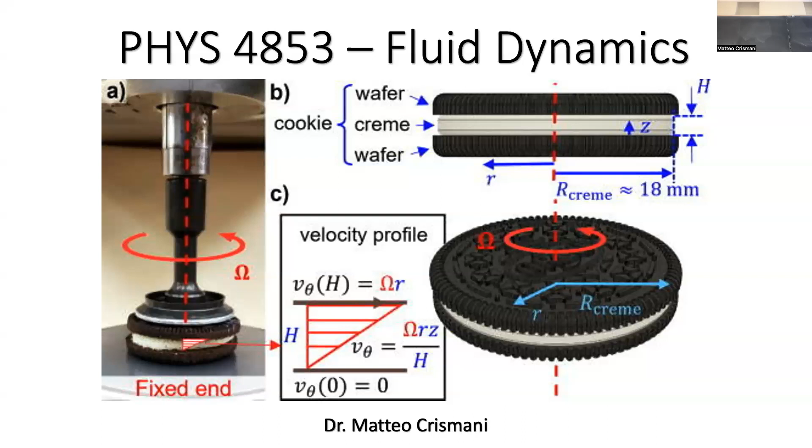Okay, we were talking about kinematics, which is the study of how motions move without respect to the forces pushing them. We haven't developed any equations of motion, we haven't developed Newton's laws or the equivalent. So we're just talking about how do we use the tools, and what do we need, in order to describe the fluid itself.

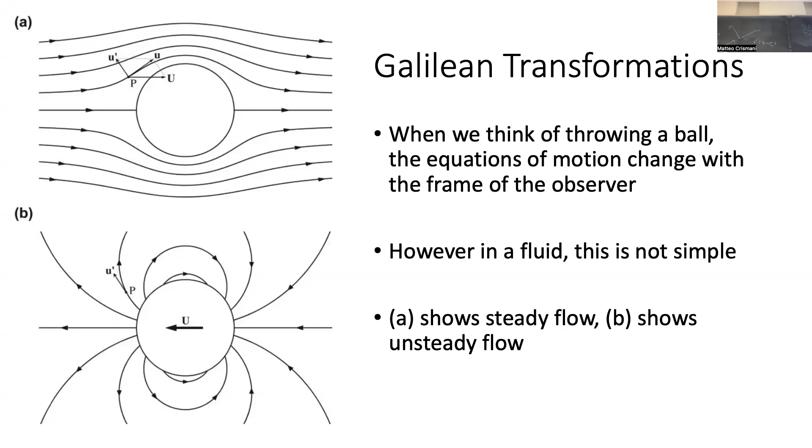All right. So speaking of, we have some stuff that you're going to hate.

Tensors. Now that word sounds bad, but it just means matrices of how many dimensions? Yeah, that tells you how many. Usually more than 2, right? Matrix is 2, vector is 1, tensor is like 3, 4, 5, right? Okay, we're not doing general relativity, so they're not going to be awful, but we will need to understand them. If you're thinking about it in computational terms, just remember, this is an array with 3 dimensions. I can do it. Okay?

Okay, so we need to consider the ways that a fluid parcel can deform. And this is going to take us back to a couple different ideas. First is this idea of stress. When we first talked about the idea of stress, we were talking about it with respect to something called viscosity. And almost unanimously, people did not like my explanation of the viscosity and how stress is transferred. So I want you to imagine something really quickly. This is the pitch drop experiment. Okay. The pitch drop experiment looks like this.

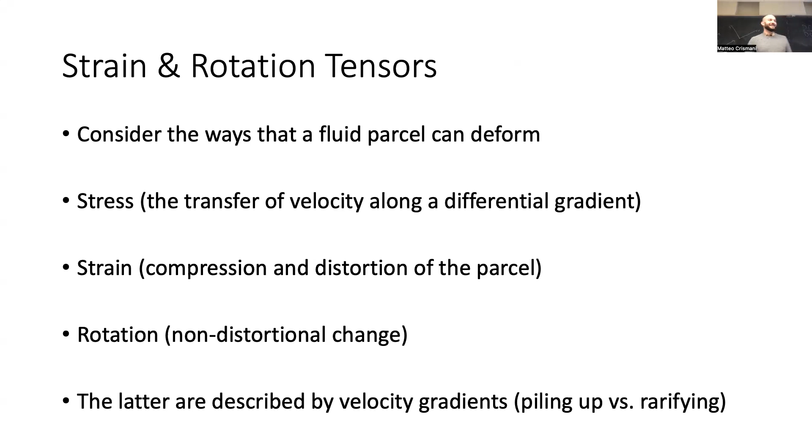Right? Okay. We're going to get a sense for all of these terms. So this fluid would be like air and not water, right? What? This fluid would be like air and not water. Doesn't matter. They both work. We'll talk about the compressibility of air. And it's funny, it's mostly incompressible. Surprisingly, for like physicists. So okay.

Would be like A, B, C, and then everything else zero. Could be 0, but it could be anything. Oh. But it would have to be D, D, E, E, F, F. That's the definition of a symmetric matrix, right? Now, F and E can equal each other. In fact, they can all equal each other, but it has to look like that, right? What about this one?

It just had a bunch of random values. Nope. The opposite. This way, flip signs. There are flip signs. Down the diagonal, there's what? Nope. Here. Why zeros? I already told you that was anti-symmetric, right? So it has to be. If I have 0, 0, 0, A, B, C. What? Because that's how I'm filling it out. Oh, like it would be A, B, C, because anti-symmetric and non-symmetric are the same thing.

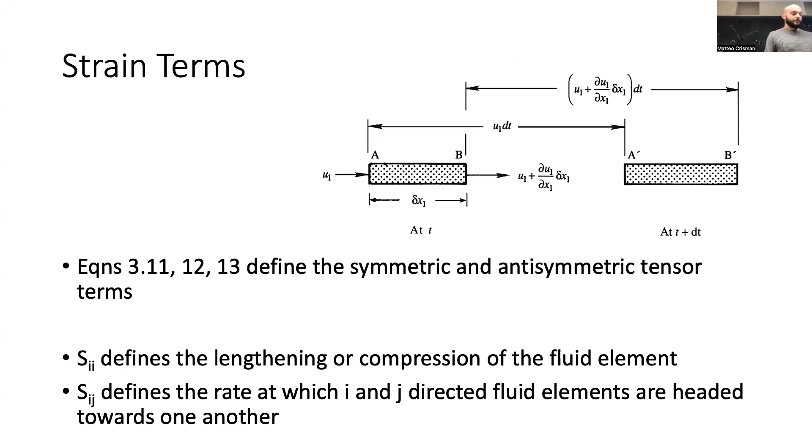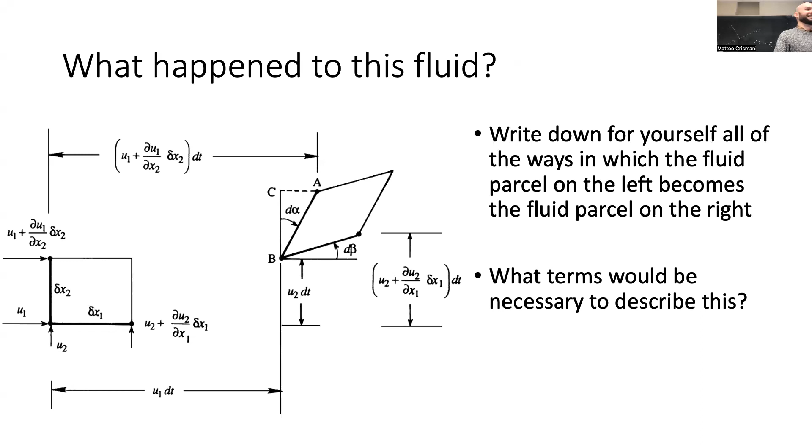Happy? Unhappy? Raise your hand if you're cranky. Okay, raise your hand if you're always cranky. Okay, good. All right. Nothing. Okay.

So we talk about the rotation tensor. You can define it in a really fun way. Okay. There's no erasers on this side, and what, all of them on this side?

So in fact, when we talk about a fluid, when we talk about the rotation forms, we can make this really fun mathematical construct. And say Rij, that's the rotation tensor, right? I'm going to call it minus Levi-Civita epsilon ijk omega k. What is the Levi-Civita symbol?

So, how do you pronounce it? Yeah. No way, no. How do you say it? Civita. Okay. Like Civita. Is it not Italian? Ceviche? Yeah, no, that's a Mexican dish. All right, say it however you want. I don't care. It's not Lagrange. You don't have to get it right.

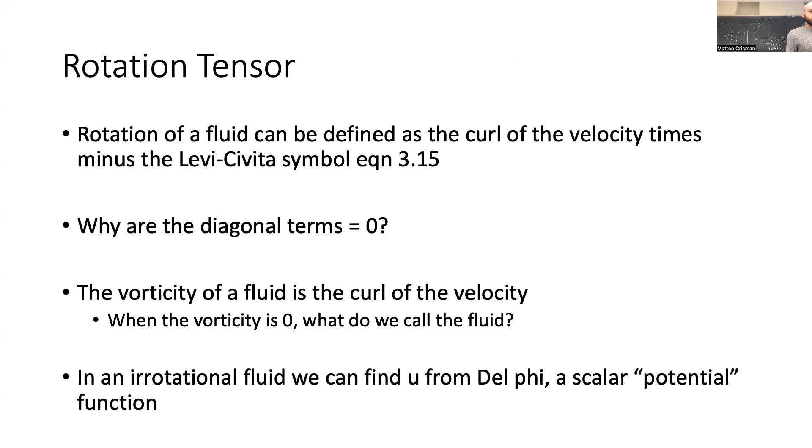So in fact, say you have some conductor and you pass it through a magnetic field. Holy shit, that looks really similar to the way that fluid goes around a rock in a stream. And it turns out they're mathematically equivalent. Why? Because they use fields. So field formalism is really important. Another way of looking at this, you can say if del dot v equals 0, then del cross v will equal the vorticity, by definition, and you can use the potential formalism to find v everywhere.

Okay, we have enough time. Wait, are we treating that as physics? No. Sorry. There is a similarity in the mathematics in specific conditions. This is not always true. Sometimes fluids will look like the solutions to E&M. That's all I'm trying to say. Do not read more into it.

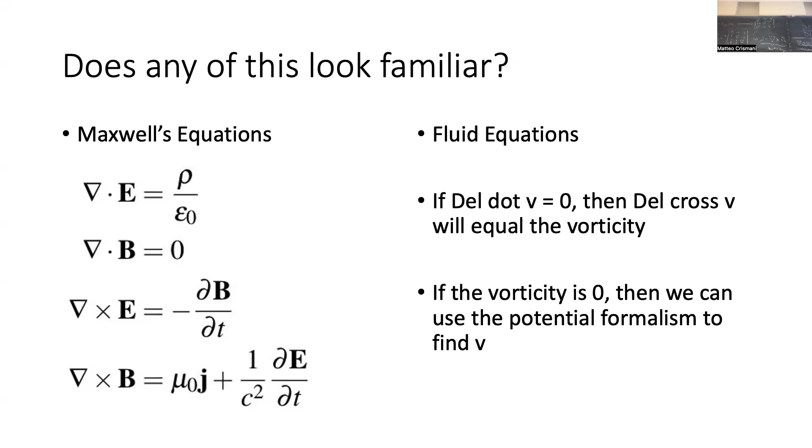All right. One more problem. Write what happens to the fluid parcel under this fluid velocity. Now, here's what you're going to do. You're going to draw this picture, A, B, C, all these ones, and just a few seconds later, under the influence of this differential fluid flow. So do it intuitively. What happens to the fluid parcel?

You're gonna write what happens to this parcel. We're gonna imagine we have a very special parcel. This parcel, we put red dye into it, and this parcel, we put blue dye into it. When we start the experiment, the flow is moving faster up here and slower down here. And we look a few seconds later, how does this look? And we're going to draw that picture so that the colors are all maintained.

What's that? Yes, but they won't mix. They will push on each other potentially, but they won't circulate into it. Yeah. Just to yourself, not yet. Don't work together yet. Just write it down for yourself so you can test your own understanding. You should have a picture written down that you'll be able to compare to what we're about to see.

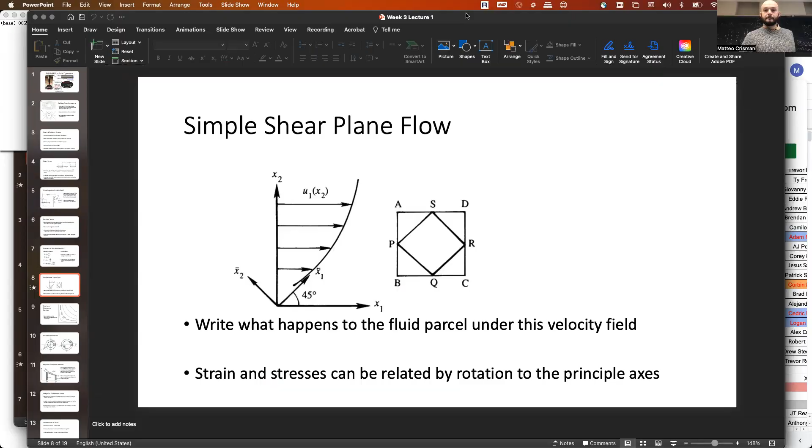There you go. Did you bring that, or is that there? Oh, okay, that's preparedness.